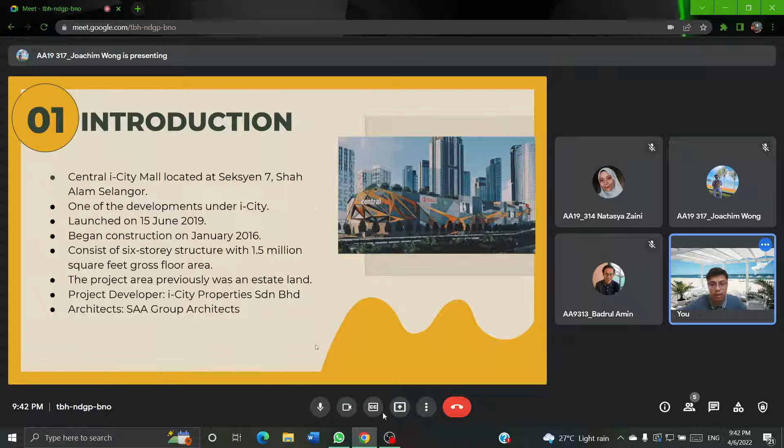Next, for the impact of construction on the environment.

Firstly, air pollution. The air that people breathe may become polluted due to construction works. Contaminants that travel through the air can cover a very big region quickly through wind, including particulate matter with a diameter of less than 10 microns.

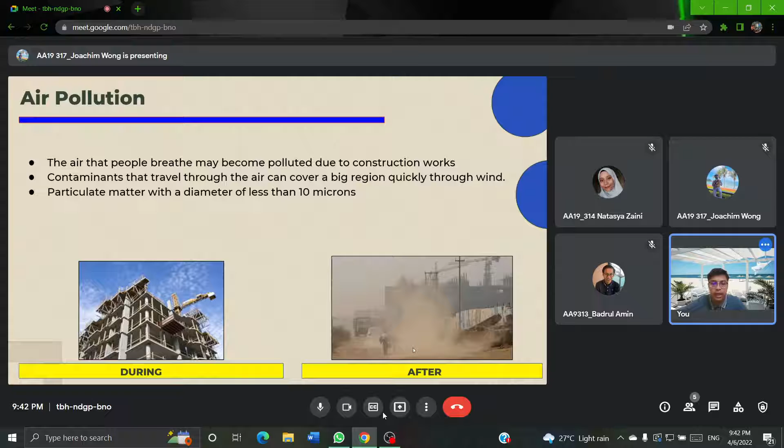Next is global warming. Construction produces about 40 million tonnes of carbon dioxide, which contributes to global warming through the greenhouse effect. The construction industry has become one of the most significant contributors of massive amounts of carbon dioxide into the atmosphere.

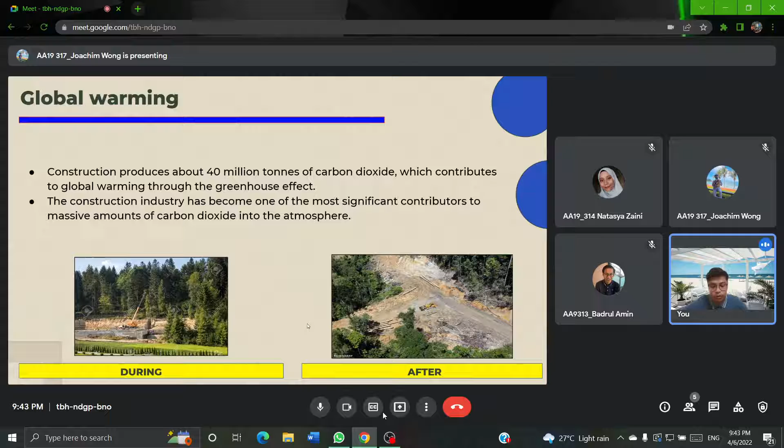Next is the impact on the general public. Most construction projects take place in very densely populated areas. Persons who live near or adjacent to building sites are more vulnerable to the detrimental impacts of dust, vibration and noise. They tend to have respiratory issues, liver illness, cancer, hearing loss, and other negative cardiovascular effects among them.

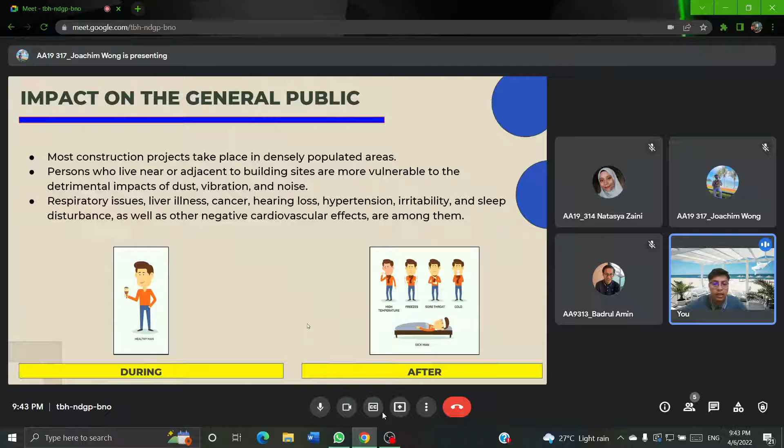Next, I pass the presentation to the next presenter.

That's all from me. I pass this presentation to the next presenter.

Thank you, Badrul. I will explain the solutions on how to protect the environment during and after construction. First, to control air quality and dust, we can do road watering at truck trails, with a vehicle station on site to water the roads. We can also do tyre cleaning basins located at the entrance or exit of the lorry or vehicle area, to help stop dirt from going onto the public road and making it slippery, which would harm other road users.

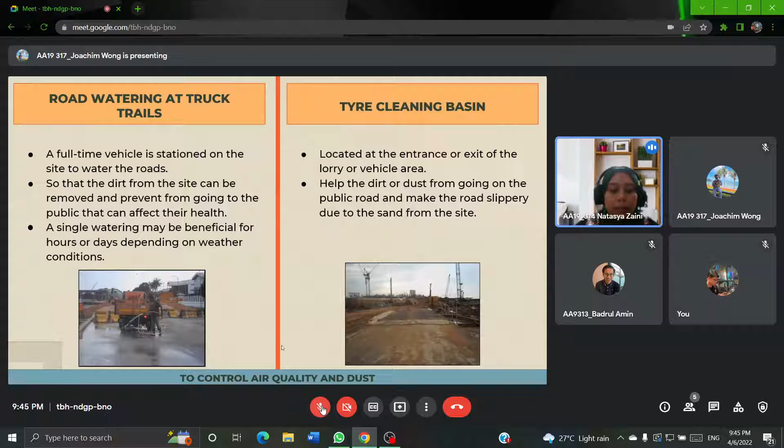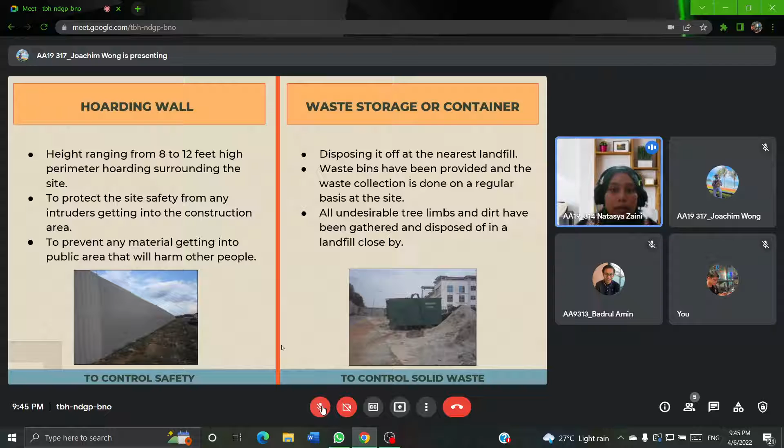Next, to control safety, we can put up hoarding walls to protect the site from intruders and prevent material from getting into the public area. Then, to control solid waste, we can put waste storage or containers, with waste collection done on a regular basis. To control soil erosion and sedimentation, we can turf bare land to avoid soil collapse, and provide cement and cascade drains so runoff from the surface can be channeled away.

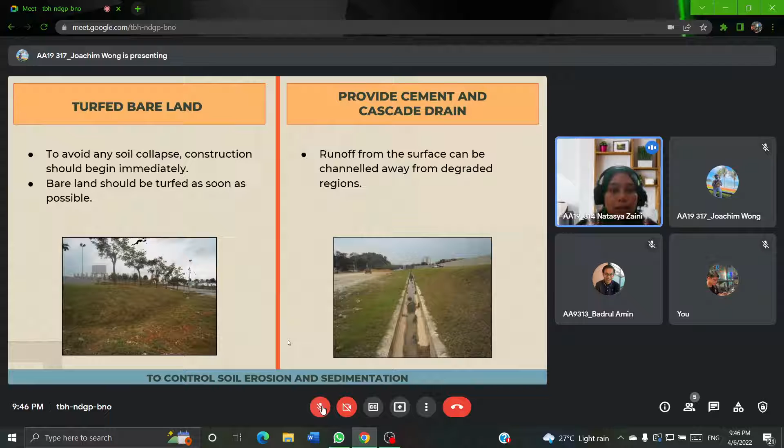To control the water quality, the waste oil will be kept in a designated area because waste oil must not be disposed in any water body, and we can do temporary sanitation facilities.

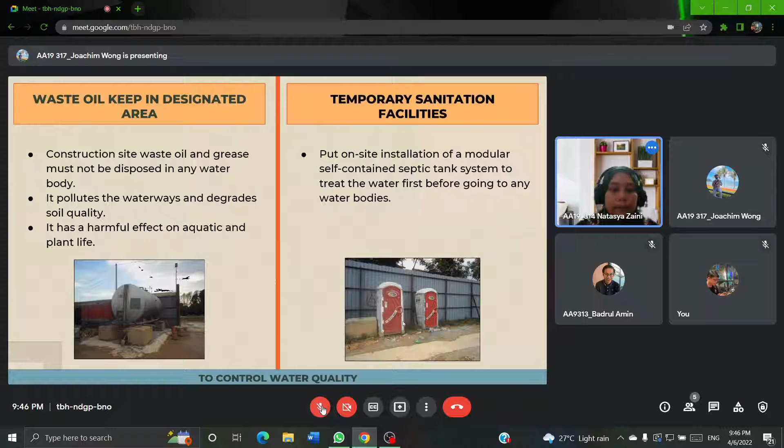To control noise, we can do phasing of development and we can do construction at higher elevation.

So the method of construction or new technologies that can be applied. First one is we can do hydroseeding, which is used to grass the exposed slope or uncovered soil. This is to avoid any soil erosion or sedimentation. The method is to spread over bare dirt using a high pressure hose. It can save lots of cost because it doesn't need a large number of workers.

The second one is we can do a temporary drainage system because we can control the water quality at the construction area, and the drainage system can flow the rainwater to avoid any flooding or any catchment on denuded soil.

The last one is sustainable building materials, for example bamboo, recycled plastic, and laminated timber. The carbon footprint of the structures can be lowered by using them, and it can also help human health. The positive side effect is it can develop more green buildings.

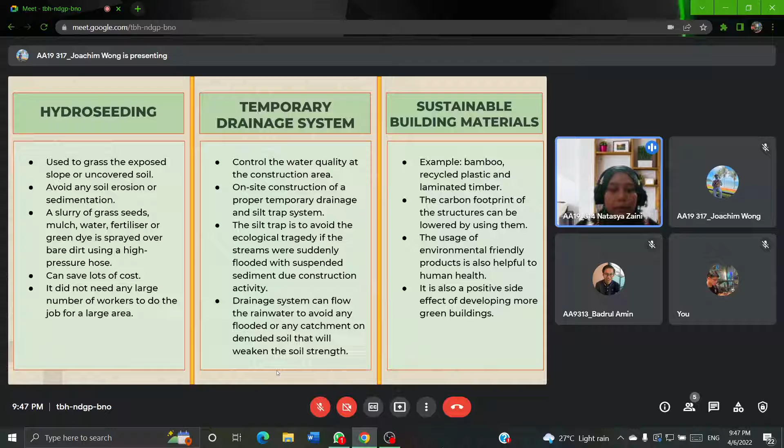So I will continue the presentation by discussing the Acts related to the issue when constructing the central ICT mall. The Act related is the Environmental Quality Act 1974. Under this Act, Part 4, Section 22, states the restriction on pollution of the atmosphere whereby air pollution needs to be controlled during construction work, or else there will be a penalty of 10,000 ringgit or 2-year jail.

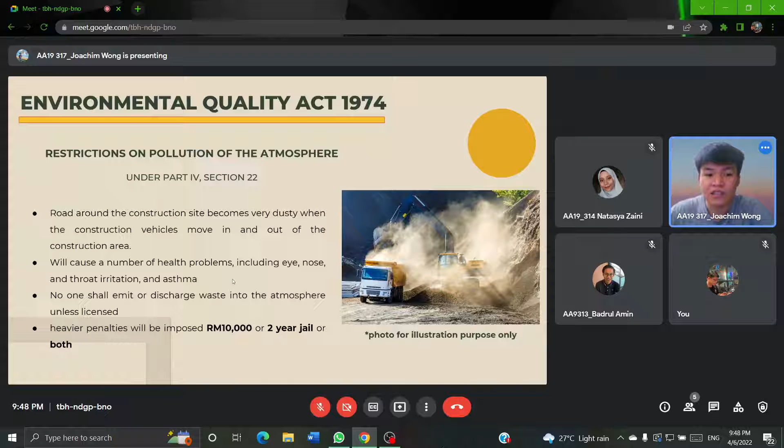Next is the Environmental Quality Act 1974 under Section 23, about the restriction on noise pollution, whereby what generates a lot of noise needs to be controlled, or else there will be a penalty of 5,000 ringgit or 1-year jail.

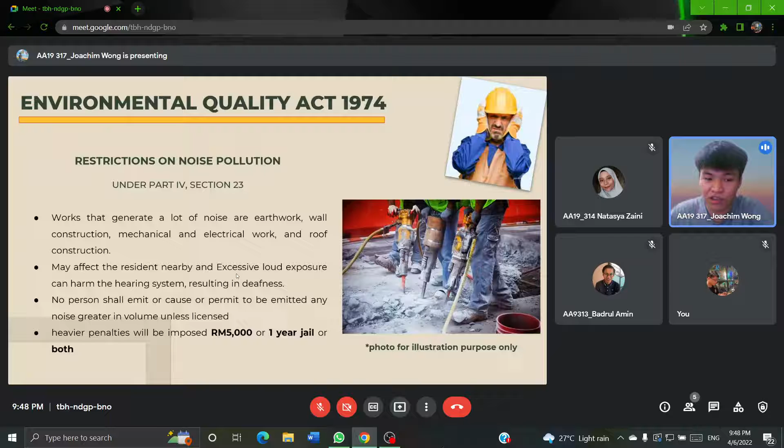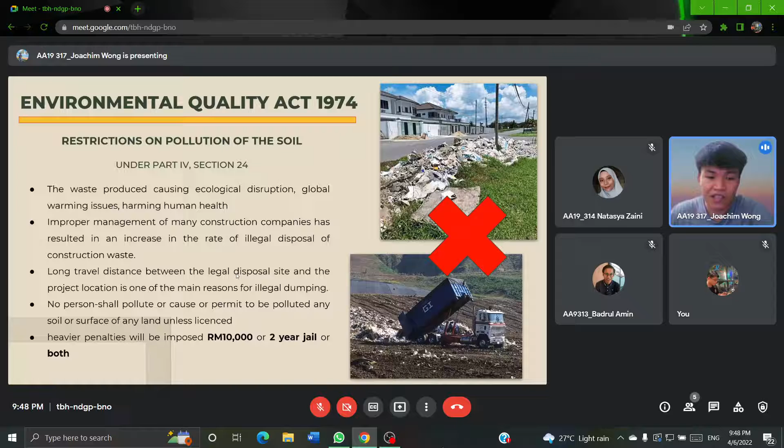And in the Environmental Quality Act 1974 under Section 24, it also discusses the restriction on pollution of the soil, whereby illegal disposal of waste which will cause pollution to the soil is prohibited, or else there will be a penalty of 10,000 ringgit or 2-year jail. Next is the recommendations.

To reduce air pollution, the management team can assign a full-time worker for road watering at truck trails, provide a washing basin at the entrance of the construction site, and control the speed of construction vehicles under 35 km/h.

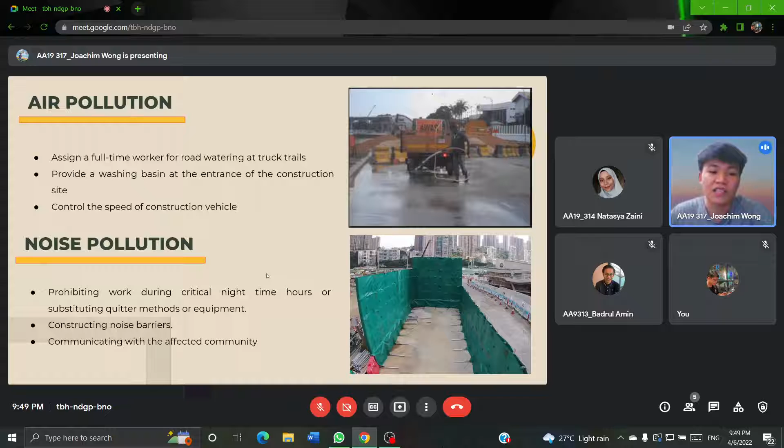To reduce noise pollution, construction teams have to avoid works during critical night-time hours or substitute quieter methods or equipment. They can also construct noise barriers, but of course the most efficient way is to communicate with the affected community so that the teams can respond to their noise complaints and meet the needs of the community.

Last but not least, to improve waste management, the team has to practice the 6 waste management principles which are eliminate, reduce, reuse, recycle, recover, and dispose. They can also do garbage sorting, which can help in determining whether the waste may be reused or recycled. The management team should include essential waste management techniques in the plan, which include waste sorting, recycling or reuse, and waste disposal procedure.

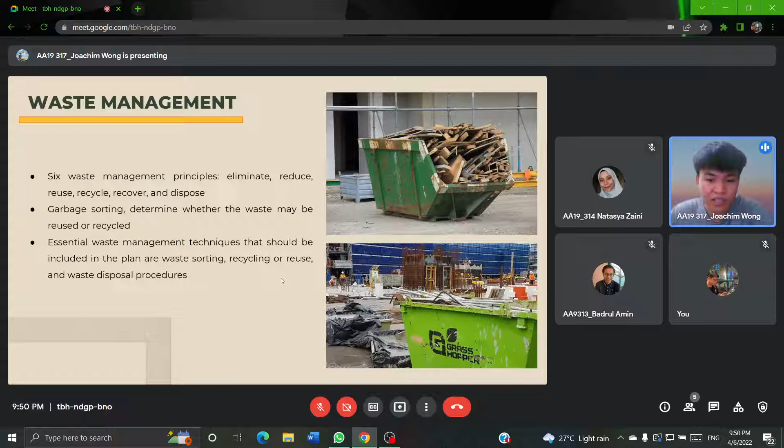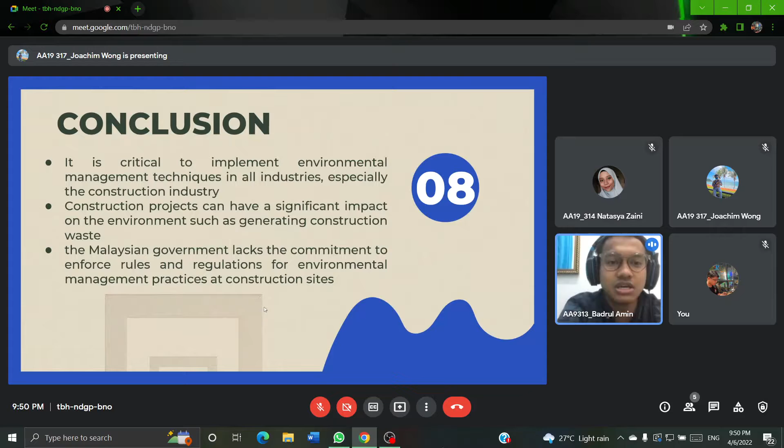Okay, I will continue this presentation with the conclusion of the project. The first one is it is critical to implement environmental management techniques in all industries, especially the construction industry. The second one is construction projects can have a significant impact on the environment, such as generating construction waste. Last but not least, the Malaysian government lacks the commitment to enforce rules and regulations for environmental management practices at construction sites. That's all from us, from Group 35.